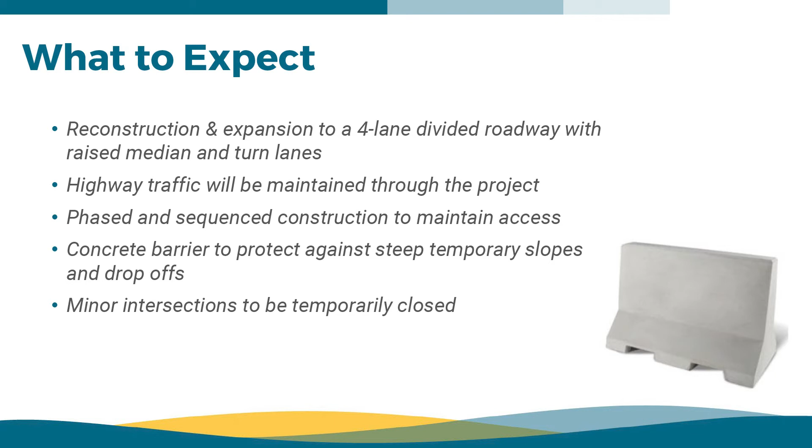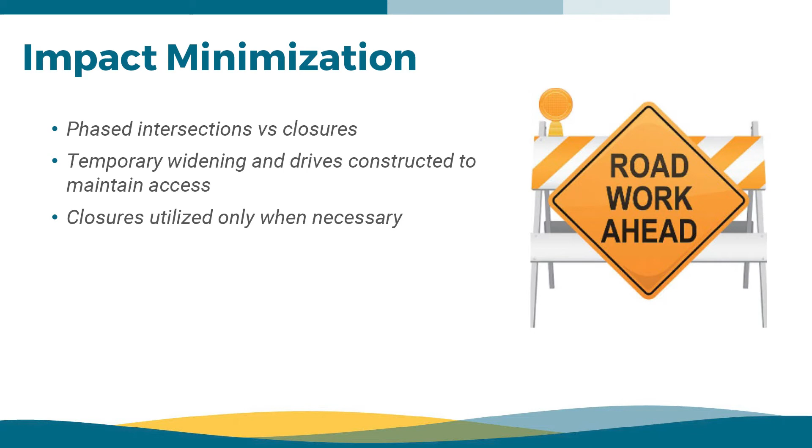Along the lines of impact minimization, there's a number of measures that will be taken, which include constructing critical intersections in multiple phases so that they can remain open to traffic during construction rather than closing and building the intersections all at once. Constructing temporary widenings and temporary drives to maintain access to all homes and properties along Highway 75, and utilizing closures only when necessary and only on those intersections specifically designated as allowed to be temporarily closed.

And I will turn it over to Ryan, who will walk through each phase of the project. Ryan will cover the bridges and some of the drainage, and I'll cover the highway.

Good evening, everyone. My name is Ryan Scranton with Hawkins. I am on our bridge team, and I've been with Hawkins for about 13 years. I've made about half my career on the 75 corridor.

I was involved in the Platte River Bridge north of town here, so I'm familiar with this area. About 15 years ago, the bridge that we're going to reconstruct, Hawkins actually redecked. So Hawkins has a great familiarity with the structure work in this area.

As far as this bridge is concerned, this project is predominantly roadway earthen fills or cuts and paving. The bridges and structures on this job have a very minor role, but because we're all here today, I'll touch on them a little bit.

Near Hy-Vee there is a bridge over the Union Pacific Railroad tracks, and that bridge will be completely knocked down and reconstructed, and it'll be done in phases.

I think that'll be great for the traveling public. From the summer or fall of this year until August of 2022, we will build phase 1. That's actually a little bit of a slow build for a bridge, but this bridge is a pretty stout bridge.

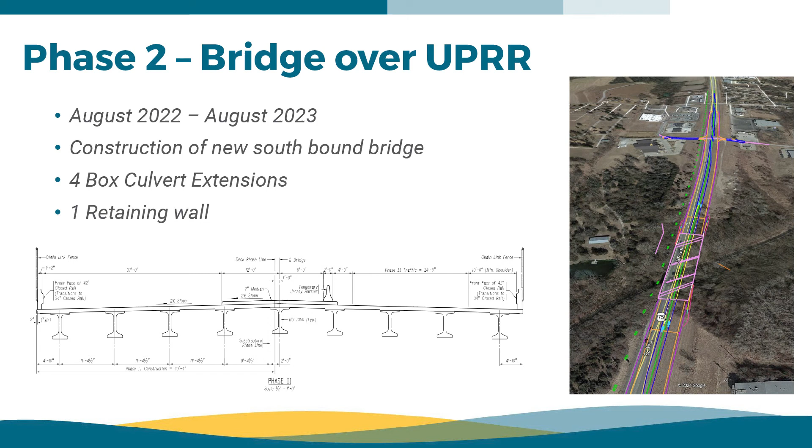Phase 2 paving will be pretty similar to phase 1, obviously on the other side of the highway though. It'll last generally from July of 2022 to July of 2023. Once all the phase 1 pavement has been constructed, traffic will then be placed on the new pavement so that demolition of the existing highway can take place.

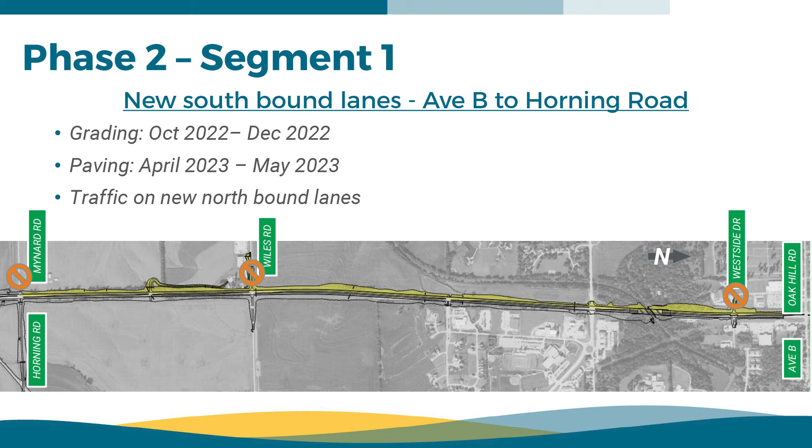After demolition of the old roadway, we will then begin the phase 2 earthwork, which will have a similar north to south sequence as phase 1. The Avenue B to Horning Road stretch will have earthwork done at the end of 2022 and paving complete in May of 2023. Segment 2, from Horning Road to Young Road, will have earthwork done in April of 2023 and paving done in June of 2023.

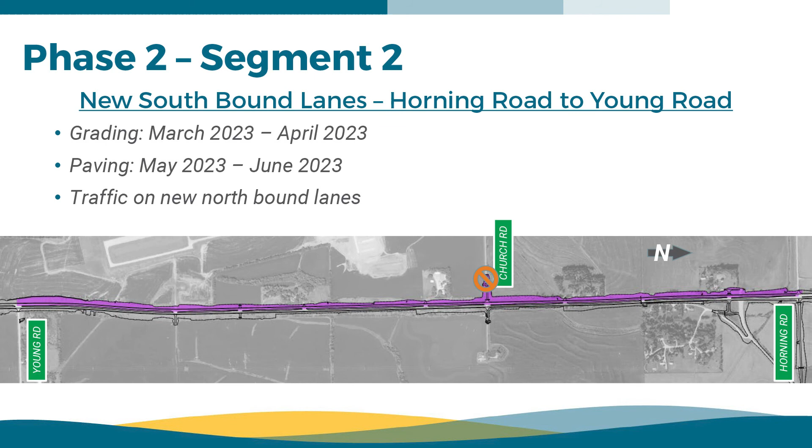And finally, the south end of the project, the final segment of phase 2 from Young Road south, will have pavement complete in July of 2023. At the completion of phase 2 paving, southbound traffic will then be placed on the newly constructed lanes, with traffic in the driving or outside lane in each direction. This will allow crews access to the inside lanes in each direction to complete phase 3.

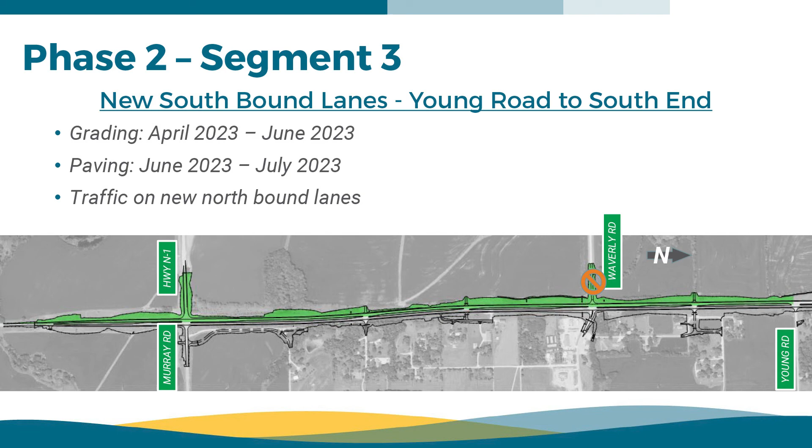All right, lastly, for phase 3 of the bridge, all the structural concrete will be placed and poured on the project. The bridges themselves will be complete and could receive traffic. However, in the final stage of the job, a protective membrane is put down over the bridge deck, and at that time, the approaches are milled and the bridge deck is overlaid in asphalt.

After the asphalt placement is done, the permanent striping can go down and the bridge can receive the final configuration of traffic. That would be the completion of the bridge over the Union Pacific Railroad in phase 3 of the project.

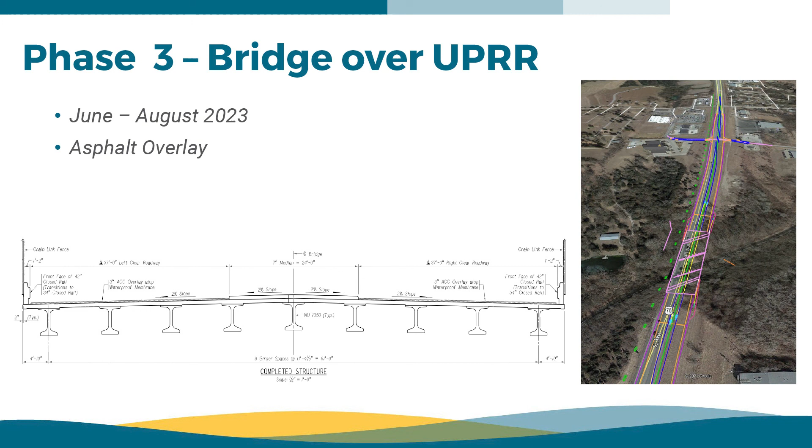Once the new northbound and southbound lanes of Highway 75 are complete, which is phase 1 and phase 2, and traffic is utilizing the outside lanes in each direction, the work on the median and the left turn lanes can be finished. Because the primary construction activity in this phase involves left turn lanes, the ability to make a left will be impacted in areas where turn lanes are actively being constructed.

However, when the turn lanes are completed, they will be opened back up to traffic as we go, once the concrete has sufficient strength, striping, and signage. This final phase will wrap up towards the end of 2023 and will complete construction of the project. Thank you.